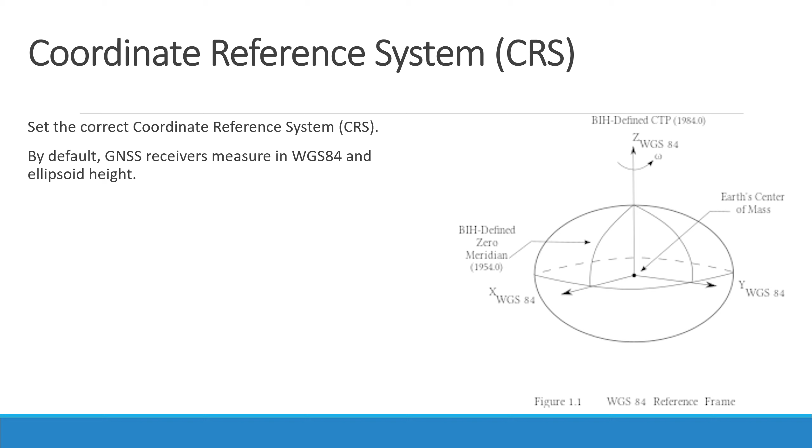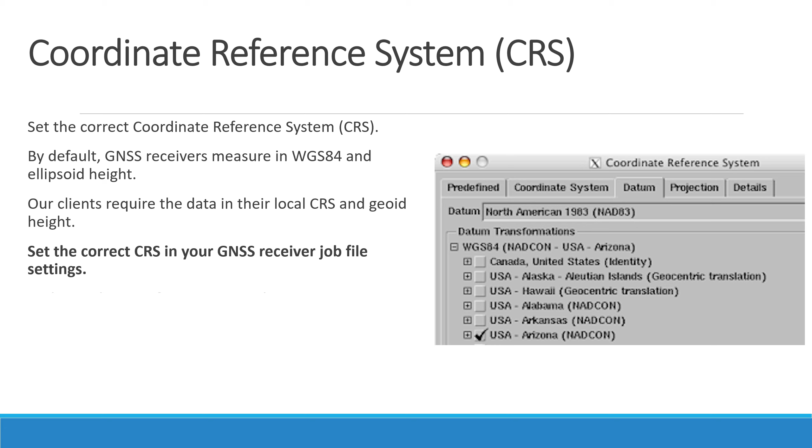inflights.com/pilot. Measuring GCPs. First thing that you should know about measuring GCPs is to set the correct coordinate reference system, or CRS for short. By default, GNSS receivers measure in WGS84 coordinate reference system and ellipsoid height. Our clients require the data in their local coordinate reference system and geoid height. To put it simple, you should set the correct coordinate reference system in your GNSS receiver job file setting.

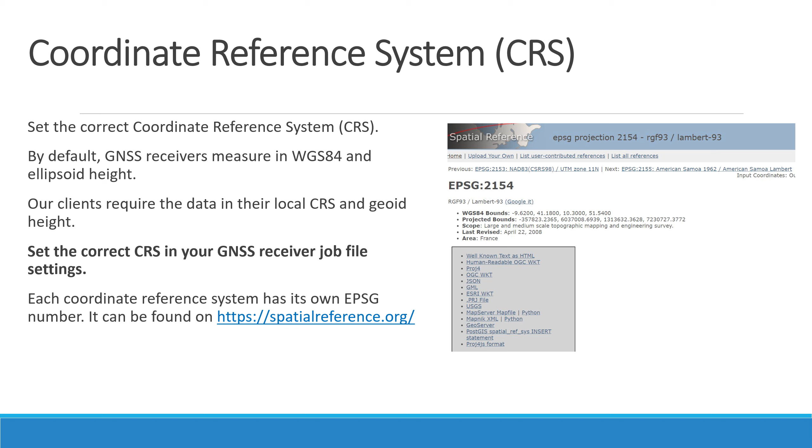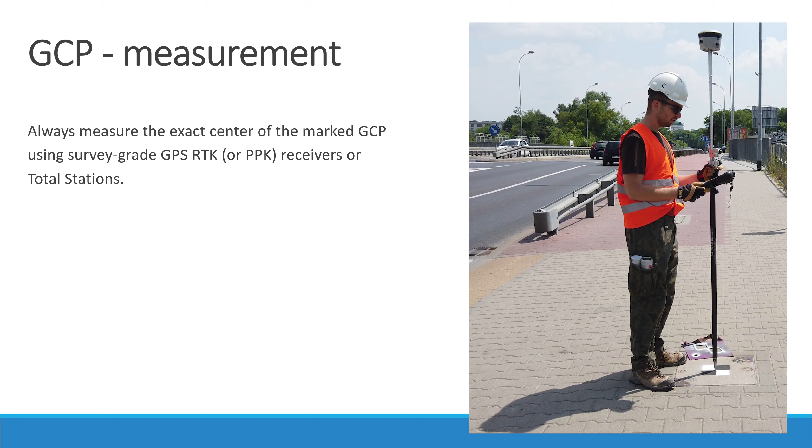Each coordinate reference system has its own EPSG number. It can be found on spatialreference.org. You can see the required coordinate reference system in our dashboard for each project. Always measure the exact center of the marked GCP using a survey-grade GPS RTK or PPK receivers or a total station. In this tutorial, we will focus on GPS RTK rovers.

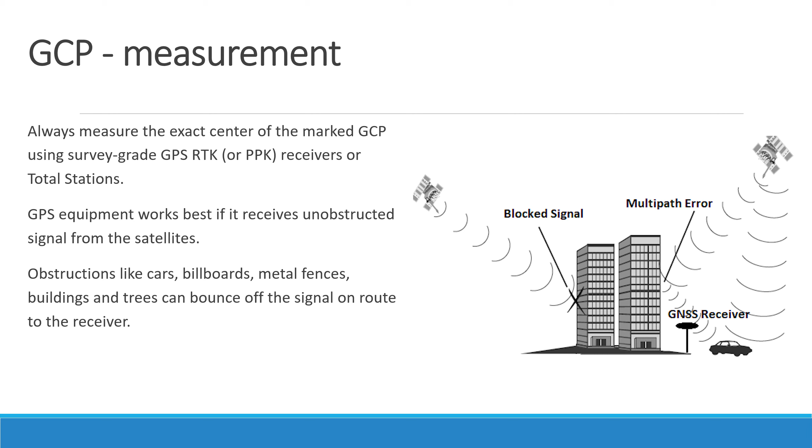GPS equipment works best if it receives unobstructed signals from the satellites. Obstructions like cars, billboards, metal fences, buildings, or trees can bounce off the signal en route to the receiver. This can reduce measurement accuracy. GCPs should be placed with clear access to the open sky and out of range of potential interference.

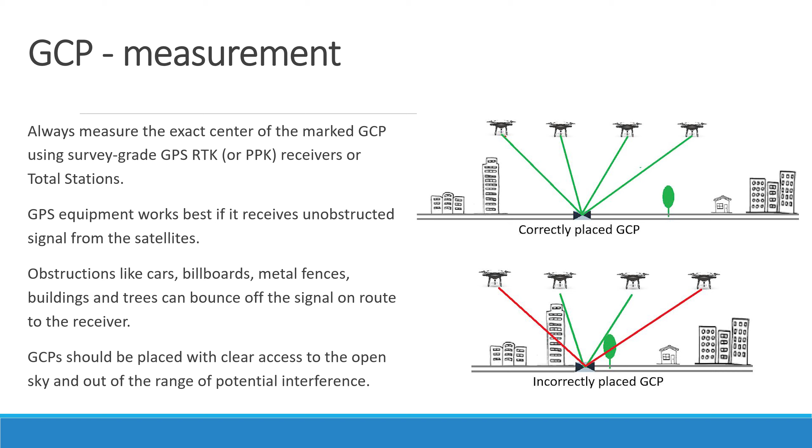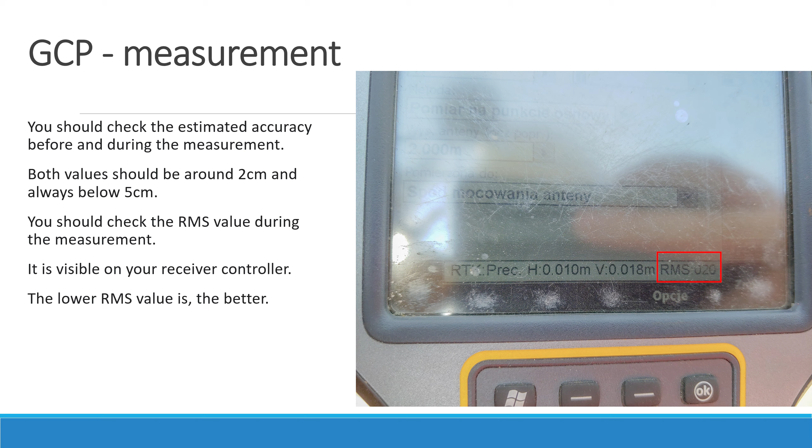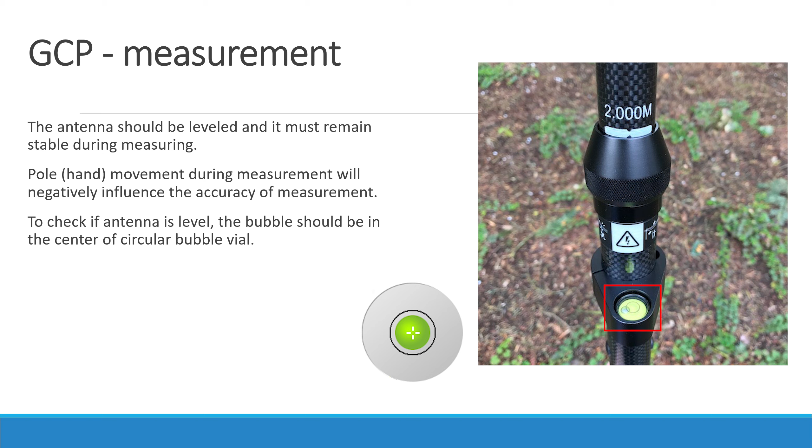The antenna should be leveled and it must remain stable during the measurement. Hand movement during measurement will influence the accuracy of GCP. To check if antenna is in level, the bubble should be in the center of the circular bubble vial. To eliminate pole movement, you should use a bipod or a tripod for the antenna's pole.

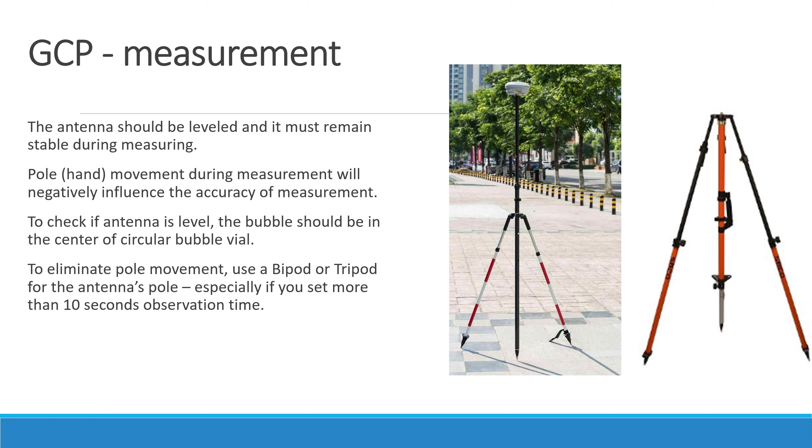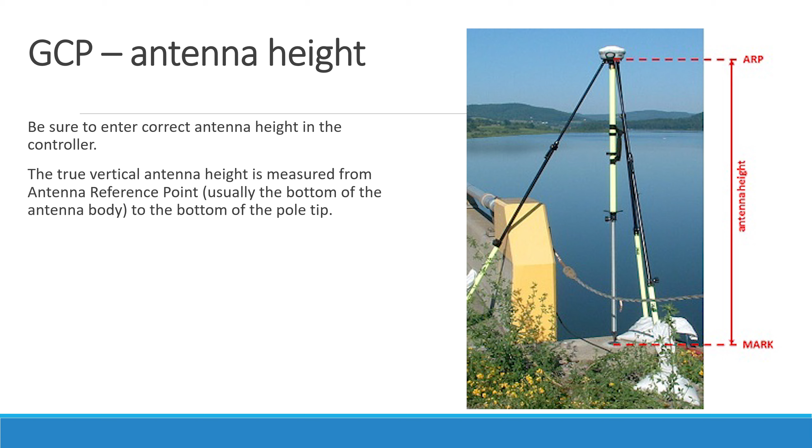Be sure to enter the correct antenna height in the GPS controller. True vertical antenna height is measured from antenna reference point, which is usually the bottom of the antenna body, to the bottom of the pole tip. Usually there is an antenna height written on the GPS pole. Any error in this measurement will affect your final point elevation coordinate.

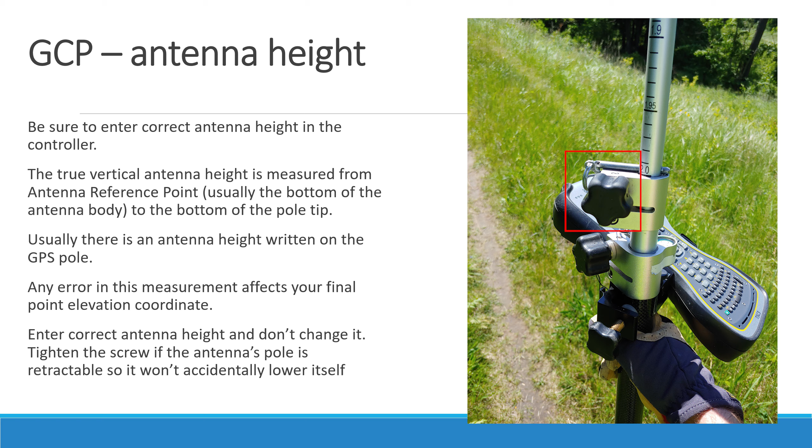Enter correct antenna height and don't change it. Tighten the screw if the antenna's pole is retractable, so it won't accidentally lower itself. It can happen when you measure a lot of GCPs in one day. In your receiver settings, set the adequate observation period, epochs. 5 is recommended minimum. It is mainly used when measuring a lot of GCPs during one day. This value is also recommended if you don't have a bipod.

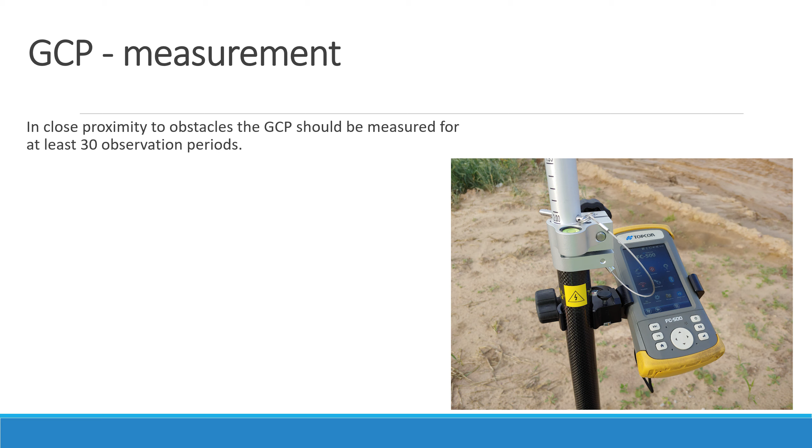30 is recommended optimal number of observation periods. It allows for precise GCP measurement. More than 30 for areas in close proximity to buildings, power lines, or trees. Bipod is required. Usually observation periods are 1 second long. In close proximity to obstacles, the GCPs should be measured for at least 30 observation periods.

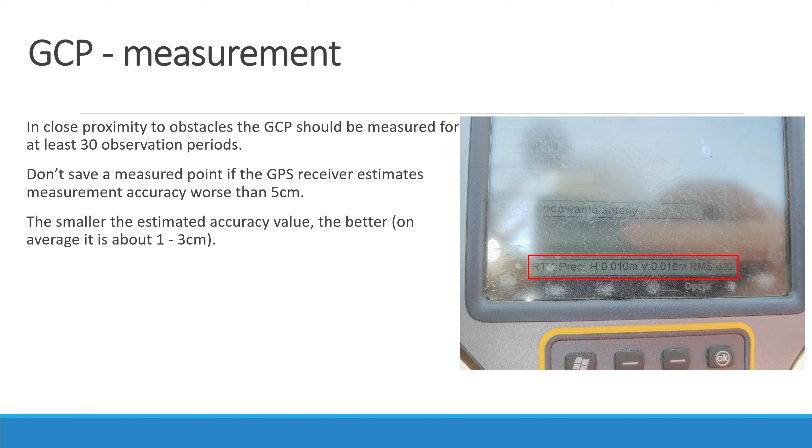Don't save the measured point if the GPS receiver estimates measurement accuracy worse than 5 cm. The smaller the estimated accuracy value, the better. On average, it should be about 1 to 3 cm. When you measured enough points, export them in CSV or TXT file. In addition, export the measurement report from the controller.

In exceptional cases, you can measure the characteristic terrain features after the flight. Make sure first that they are clearly visible in the drone images. These are features such as white stripes on the street. In this case, the accuracy of the results will be much worse.

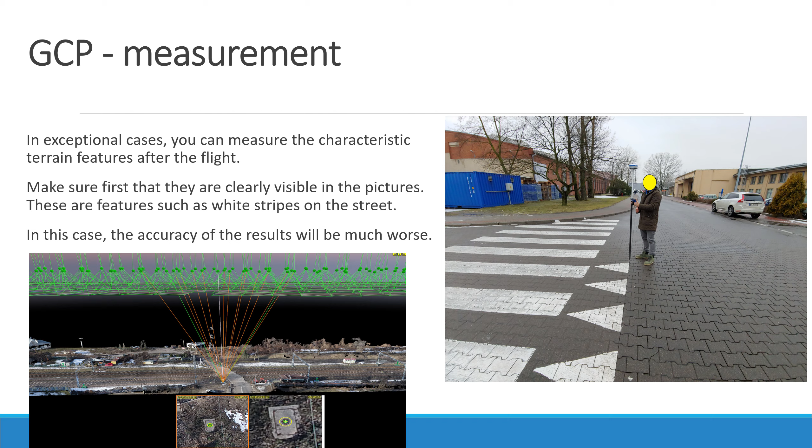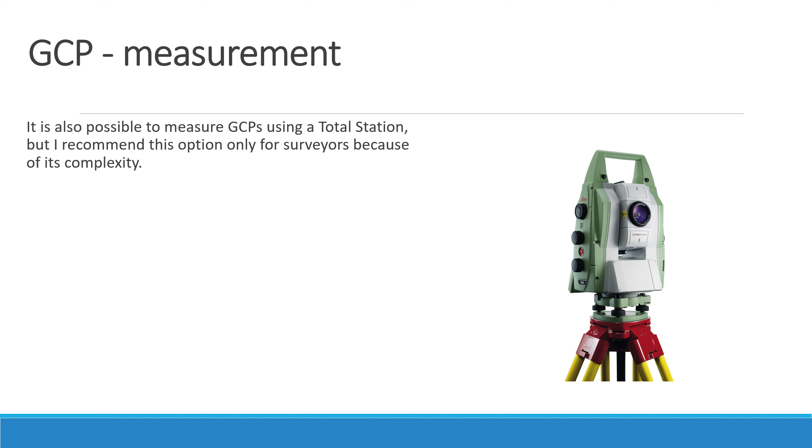It is also possible to measure GCPs using a total station, but I recommend this option only for surveyors because of its complexity. Total station's accuracy of measurement is up to 1 mm, but it requires precise survey markers to begin with. You could measure GCPs on facades of the building using the total station.

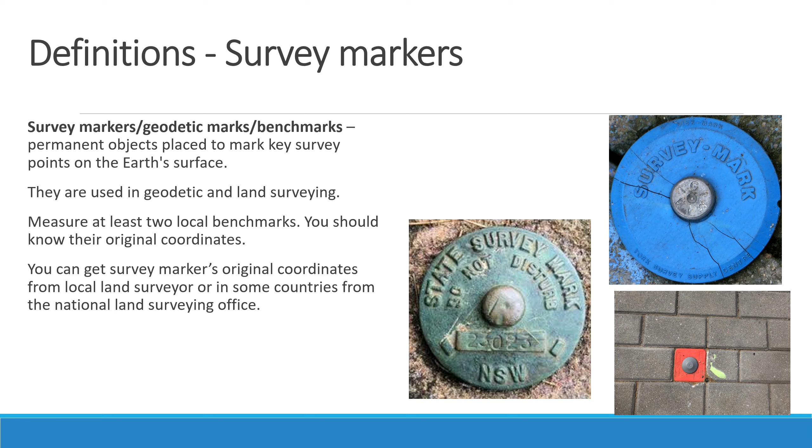Survey markers, geodetic marks, and benchmarks are permanent objects placed to mark key survey points on the Earth's surface. They are used in geodetic and land surveying. Measure at least 2 local benchmarks. You should know their original coordinates. You can get those coordinates from a local land surveyor, or in some countries from the National Land Surveying Office. This will help us to calculate the final elevation of the GCP and checkpoints.

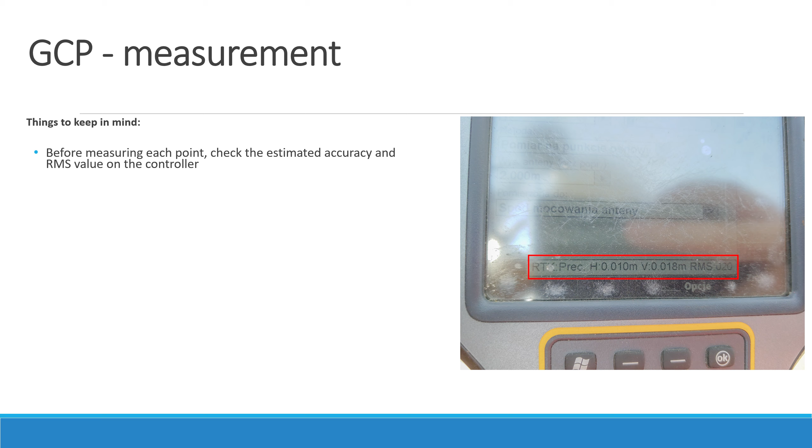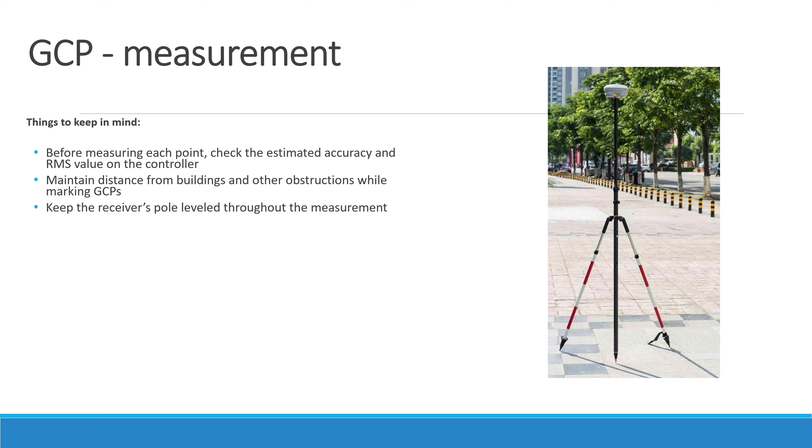Here are some things to keep in mind. Before measuring each point, check the estimated accuracy and RMS value on the controller. Maintain distance from the buildings and other obstructions while marking a GCP. Keep the receiver's pole leveled throughout the measurement. Set the correct height for the receiver's pole. Keep the pole at the same height throughout the entire measuring process.

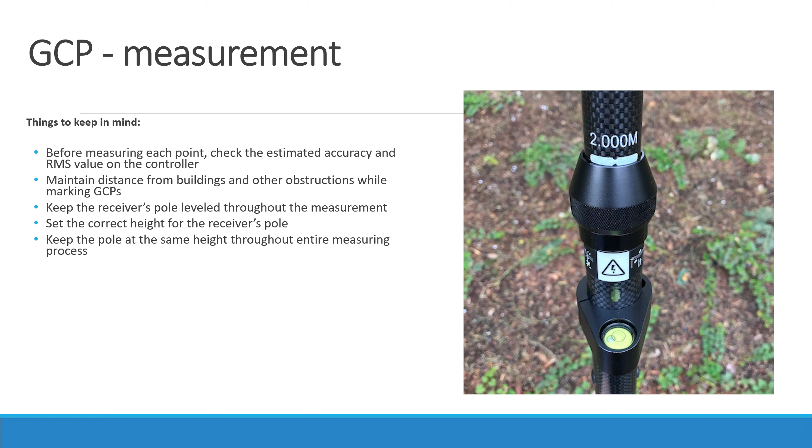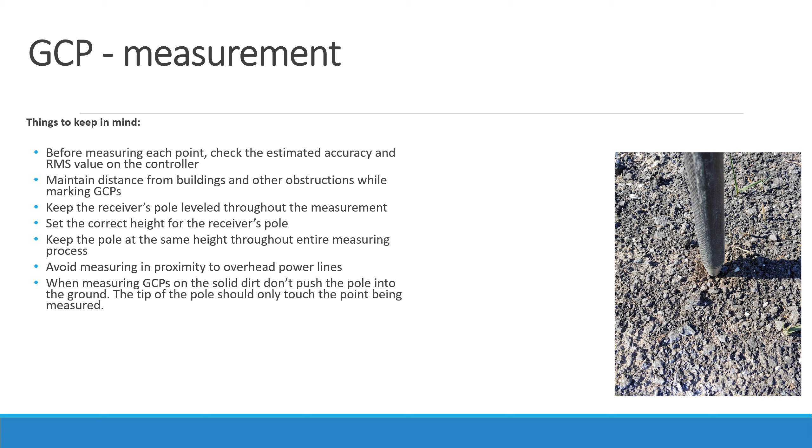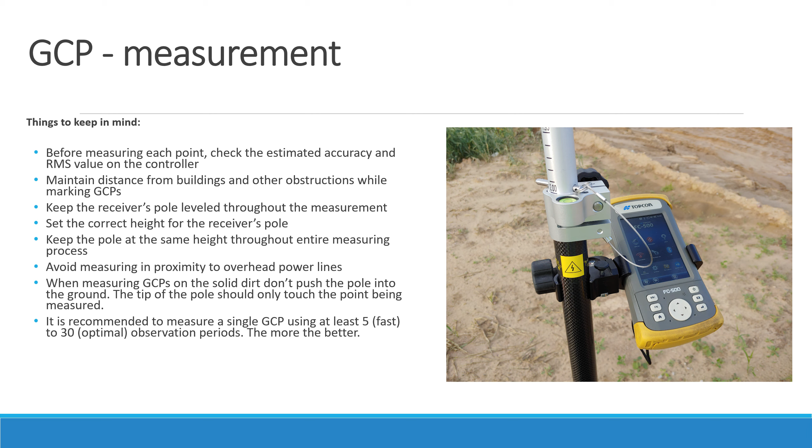Avoid measuring in proximity to overhead power lines. When measuring GCPs on the solid dirt, don't push the pole into the ground. The tip of the pole should only touch the point being measured. It is recommended to measure a single GCP from 5 to 30 observation periods. Know the EPSG code for the coordinate system selected by the customer.